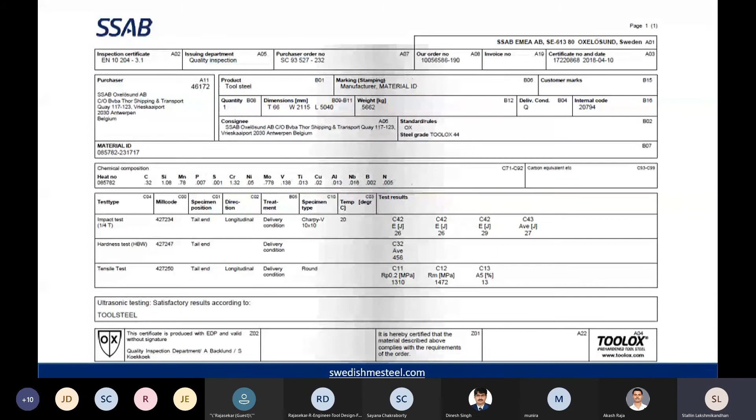So as we were discussing on the test certificate of the material, we make sure that Toolox has the world's largest testing facility in Sweden. We make sure that all the parameters inculcated into the TC are given to all the customers without any issues. So Toolox is being produced with blast furnace. It doesn't follow the age-old electric arc furnace methodology.

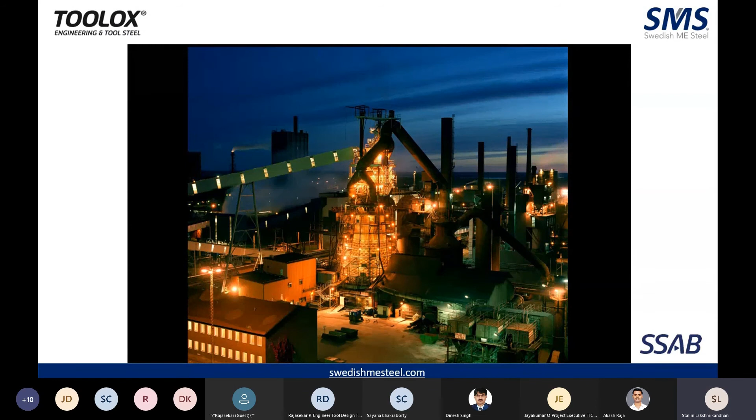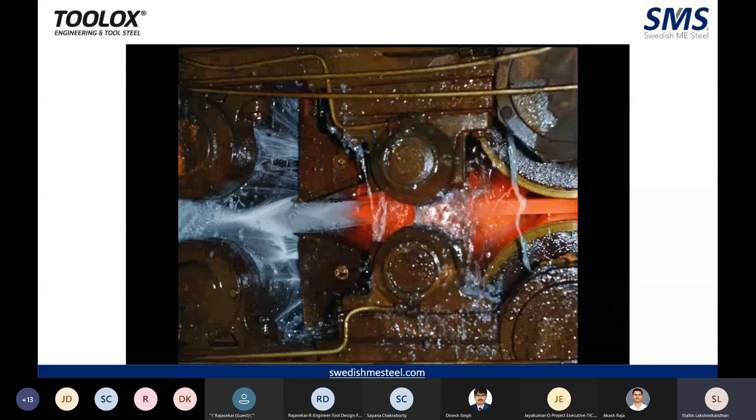So this is where the entire R&D of the metal happens. Depending upon the different thicknesses of the plate, at which angle, how much was the quantity of water being quenched, that all decides the properties of Toolox.

As seen, Toolox is a multi-purpose steel. You have 45 HRC material, with high strength, as also with high toughness. This unique combination of all three helps you in using this similar grade of material in different engineering applications. As you can see, it can be used in plastic molds, in cold forming, and in hot forming also. Various other engineering applications also you can use it for.

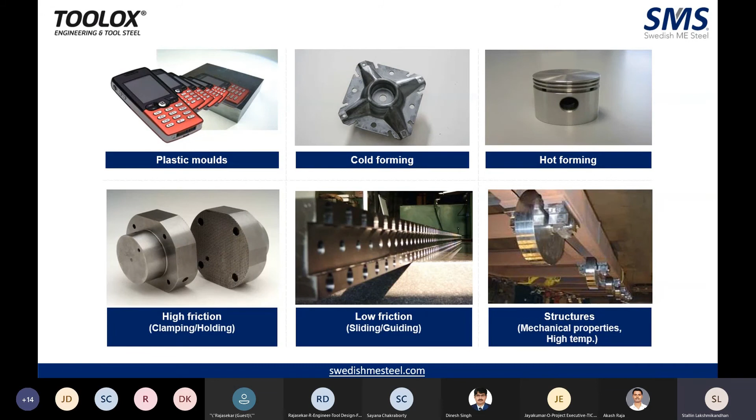So as the webinar topic goes, today we will be solely concentrating on cold forming applications.

So these might be the common cold forming grades that you would be using: D2, D3, D6, Calmax. So if you use your application wisely, and depending upon what you expect out of the material, then it's possible to replace all the grades whichever has been shown here with Toolox. So you'll be able to replace with Toolox.

So that is the advantage of using the material, that there is one grade available. If the application is being chosen wisely, depending upon what you want out of the material, then it is very much possible to use the same Toolox grade even for your D2, as well as for your Calmax, or even for your D3. So let's see during the course of the webinar how exactly it's been done.

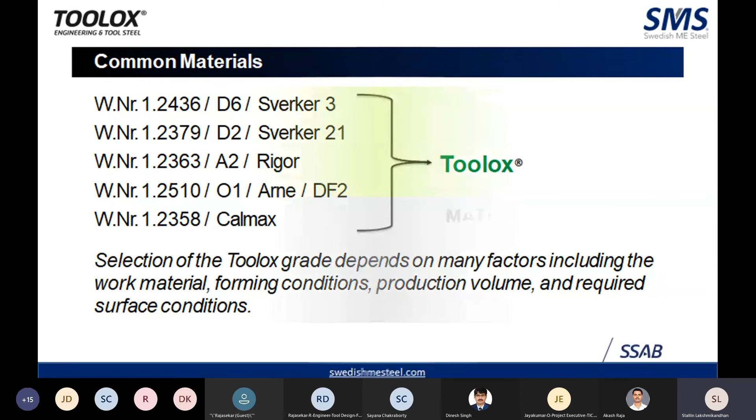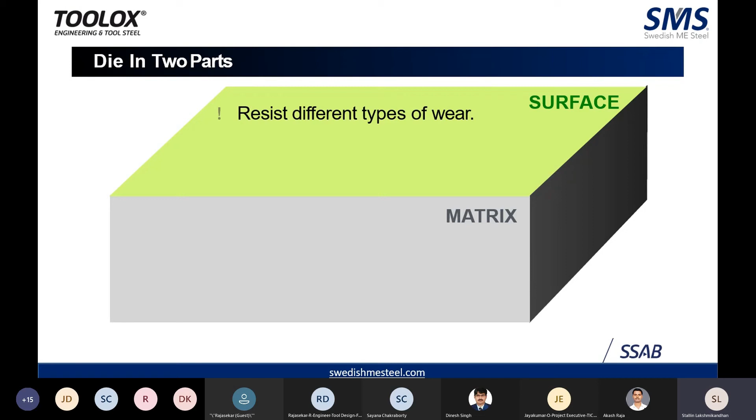So when you take a die in two parts, what the metal has to offer you both at the surface level and at the matrix level. First, at the surface level, the metal has to resist different types of wear. It has to provide you high surface quality as well as the finish, and it should be suitable for surface engineering.

Since the metal is 45 HRC, you might be having a question: okay fine, my application ranges from 58 to 60 HRC, at times even it goes up to 65 HRC, what am I to do? So the question is whether the metal is suitable for any additional treatment, and the metal is very much suitable for additional treatment.

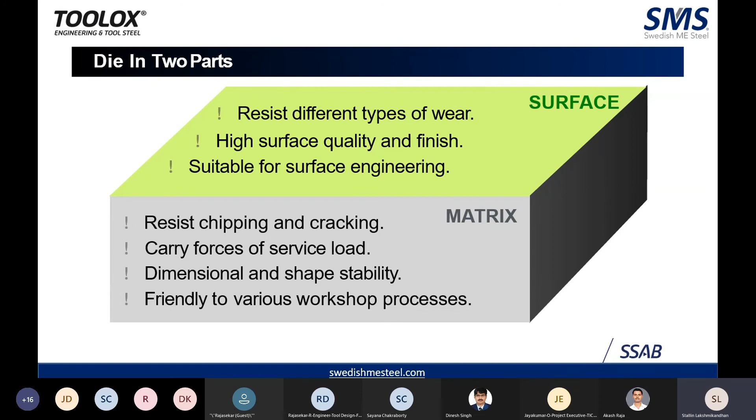So these are all at the surface level, and at the matrix level, the metal should be able to resist your chipping and cracking. It should be able to carry the forces of the service load, and it should also give dimension and shape stability. And last but not the least, it should be friendly to various workshop processes.

Let's delve into some of the failure mechanisms in cold forming. What are the general failure mechanisms that you encounter on a day-to-day basis? First one is abrasive wear, which everyone would be knowing. It has been caused by material working against the tool surface, and it usually happens with scoring. So it is a common problem that you usually associate with.

Point number two is the adhesive wear, or which we call as galling. It usually is caused by friction between two sliding surfaces.

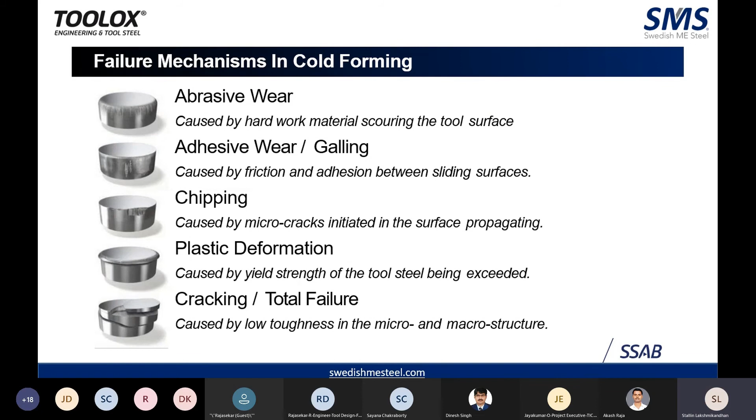So if you have any cold working tool steel right now where you face an issue of cracking, Toolox 44 can immediately replace that particular item. Because Toolox 44, as we had already discussed, comes up with not only high hardness, but also higher toughness. This higher toughness helps you in resisting against crack, both at the micro level as well as the macro level.

This is the adhesive wear test just been done.

So you can see both the scoring area as well as without any.

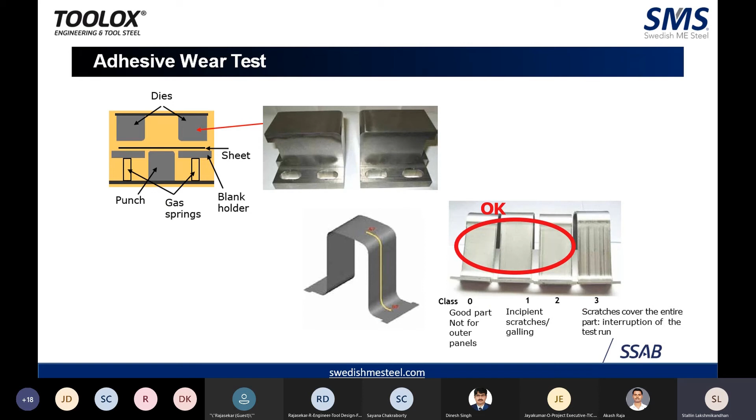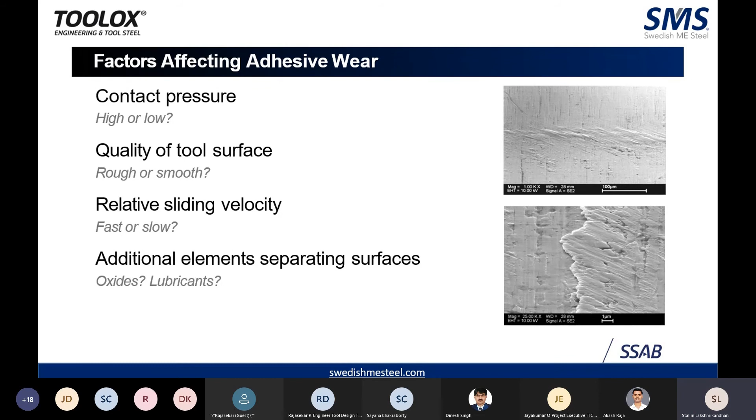Let's see what are the factors affecting adhesive wear. The main important factors being the contact pressure - you can check whether your pressure is high or low. The quality of the tool surface - whether it is rough or smooth. The relative sliding velocity - whether it is too fast or too slow. And additional elements separating the surfaces, like oxides and lubricants. These are some of the areas affecting your wear.

This picture gives you a great idea of how homogeneous the material is. More than the metal being high hard, high tough, as well as high strength, it is also a homogeneous material, so that you can machine it in whatever direction you wish, and you can also finish tighter tolerances.

So this is a 4-meter long gear rack, and the flatness demand is that you're able to get a flatness of up to 0.1 for a length of 1 meter.

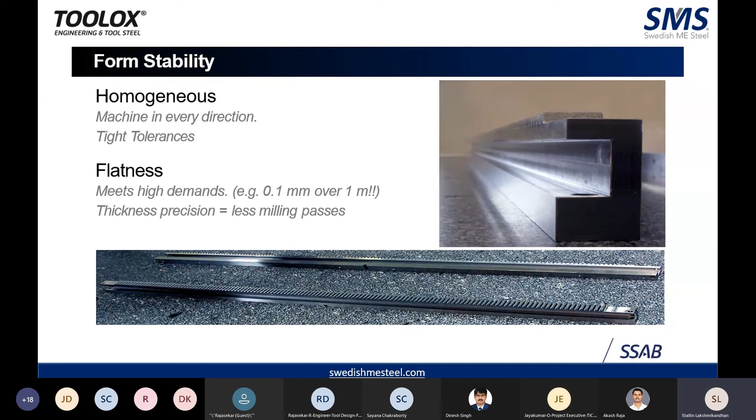So this gives you an idea of how much time Toolox 44, which is pre-hardened at 45 HRC, takes compared to a regular annealed H13 material, or D2, or whatever material you want - we have tested based on H13. Since it's a 45 HRC material, there is no need for 2 times of programming. At annealed as well as after heat treatment, you need to do another set of programming. Here, with Toolox 44, it's only one set of programming, and you can directly go for your fine CNC, whereas in H13 you have to go for rough and fine CNC. And Toolox 44, being a 45 HRC material, you will find the EDM time to be a little higher when compared to annealed material, which is understandable.

So taking everything into consideration, from raw material to the finished stage, the total manufacturing time is drastically reduced by around 25 to 30% when using Toolox 44 compared to regular material. And mind you, this is in addition to - not considering - the heat treatment time and the amount being spent, that's all extra. Simply for the material to be changed from raw material to the finished stage, the manufacturing time is reduced drastically by 25 to 30%. This is a very enormous benefit for you.

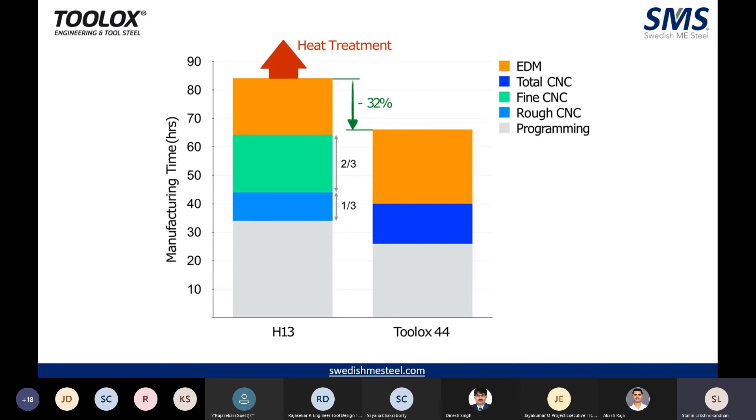Now let's look at the different surface engineering that can be done with Toolox 44. As we already discussed, Toolox is available at 45 HRC. So if I require my material to be at 58, 60, or 65 HRC, what am I to do? There are different processes you can do. Of course vacuum heat treatment is ruled out, since it's already heat treated material. You can do whatever surface treatment possible - nitriding, PVD coating, induction hardening, and also laser hardening.

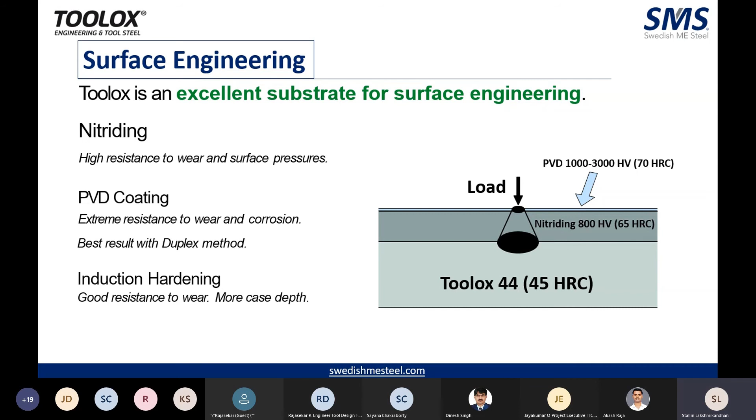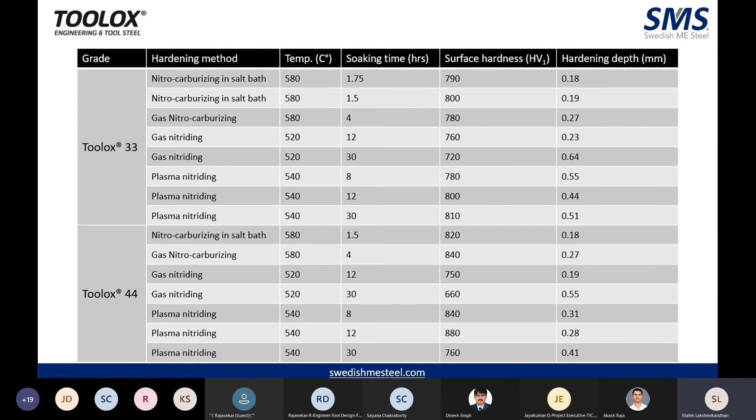This is a table which we have done for nitriding of both the Toolox 44 and Toolox 33 grades. Depending upon the surface hardness and the hardening depth you require, you can choose the soaking time and the temperature, depending on your usage and application, to decide what exactly you want out of the material. So this guide would be very beneficial when you do nitriding.

Induction hardening with Toolox 44 is also a very interesting combination, particularly due to the high yield strength of Toolox. With induction hardening of Toolox 44, the hardness you can achieve is 55 to 57 HRC, with a depth of hardness of 2 to 4 mm.

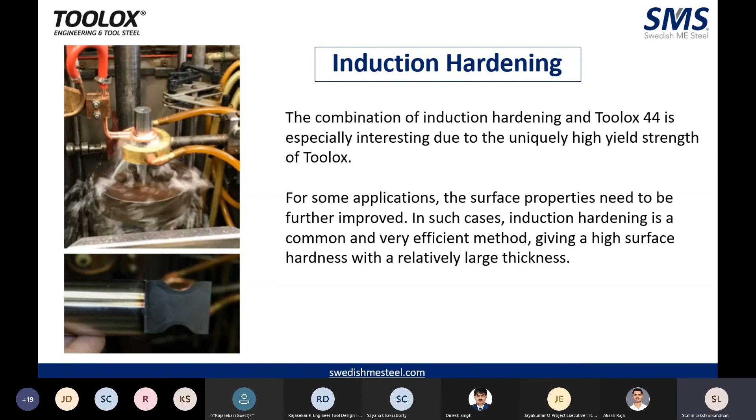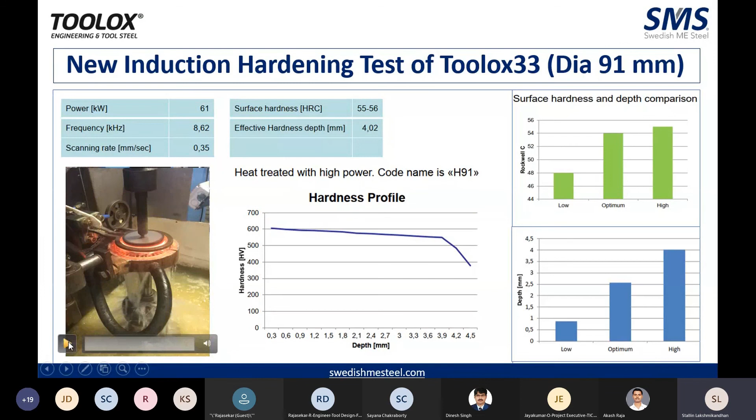So these are the parameters which we have done. This is a short video of Toolox 33 dia. As you can see, the effective hardness depth is 4.02 mm with a surface hardness of 55 to 56.

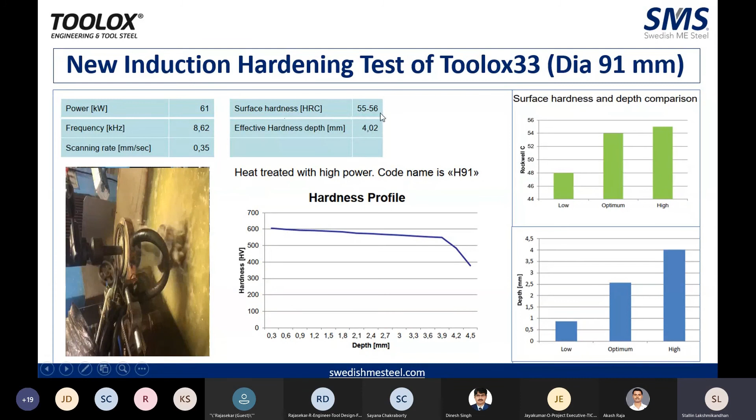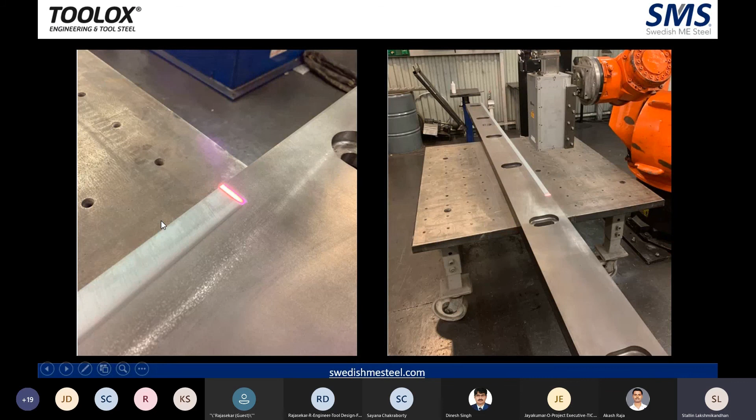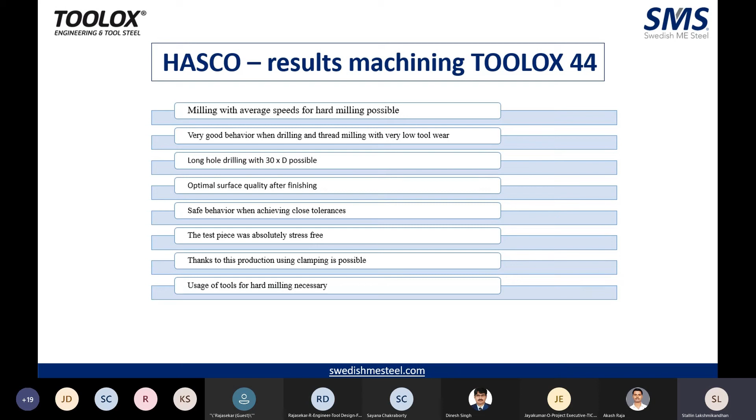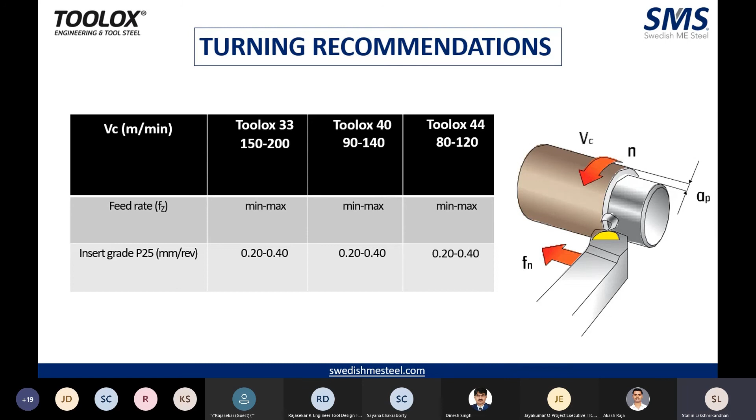So let's look at some of the machining parameters for Toolox 44. There is a mold maker available in Europe known as Hasco. They have included Toolox in their own brochure for usage, and they have done extensive tests with the machining also. So these are some of the points that have come out of their testing of the material - some turning recommendations, and some tapping recommendations.

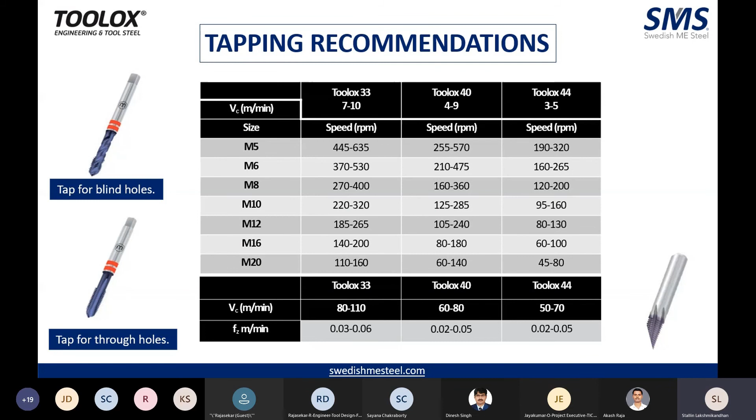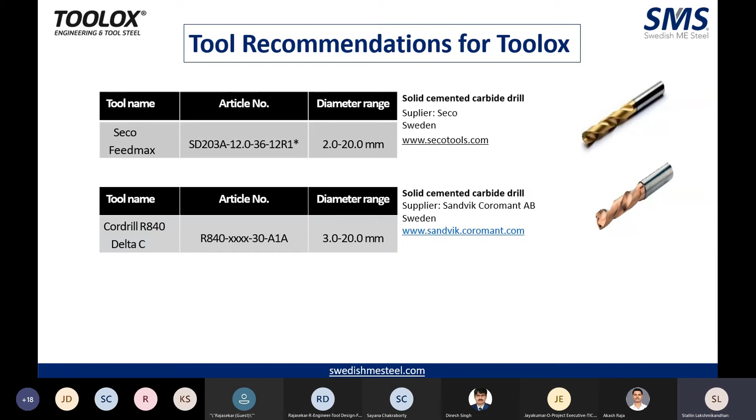Some of the drilling recommendations for Toolox - we have an extensive brochure for all the machining parameters of Toolox, and we can share it with all interested. Since it's been done on a global basis, you will find the suppliers are all of European origin, but it doesn't necessarily need to be only European origin cutting tools. You can ask your regular cutting tool supplier to provide equivalent nomenclature of tools which should be able to do the job for you.

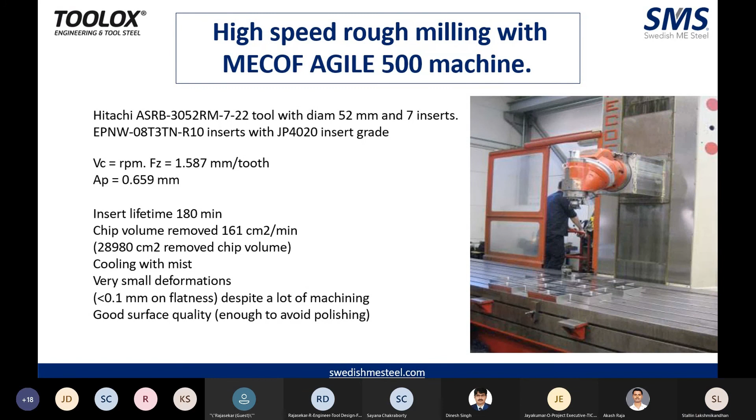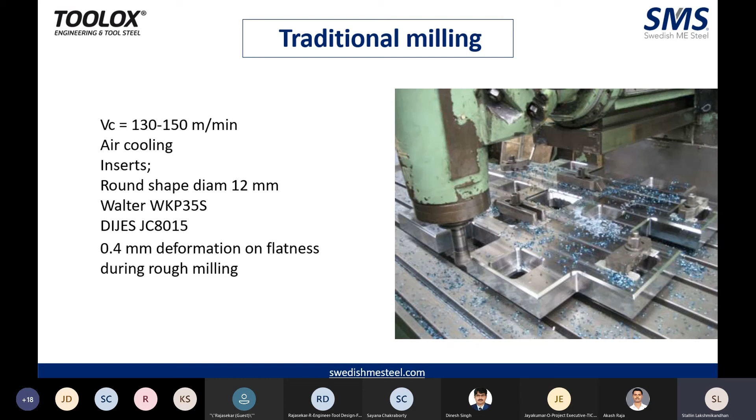Even with traditional milling, it's very much possible - you don't always require expensive or super expensive tools. In traditional milling, the deformation levels are still larger, at 0.4 mm deformation on flatness during rough milling.

This is a small video which we have done in a general tool room in Pune, India.

As you can see, 45 HRC material being milled out without any issues.

So we have looked at how Toolox is being manufactured, what are the different surface engineering processes that the metal can take, and what are the different cutting tools required for machining of Toolox 44. Now let's delve into different areas where Toolox has been used in different cold forming applications.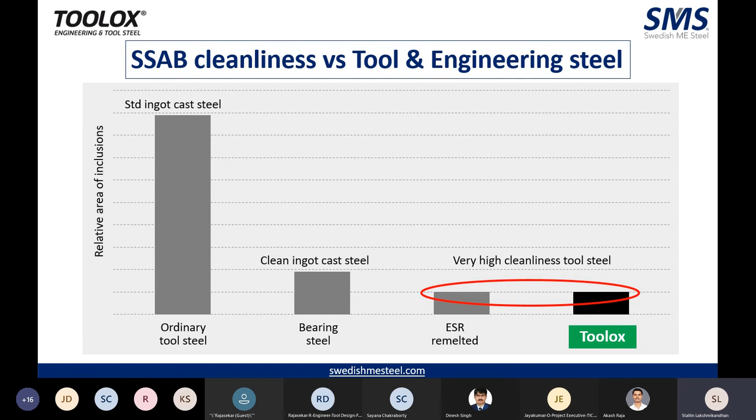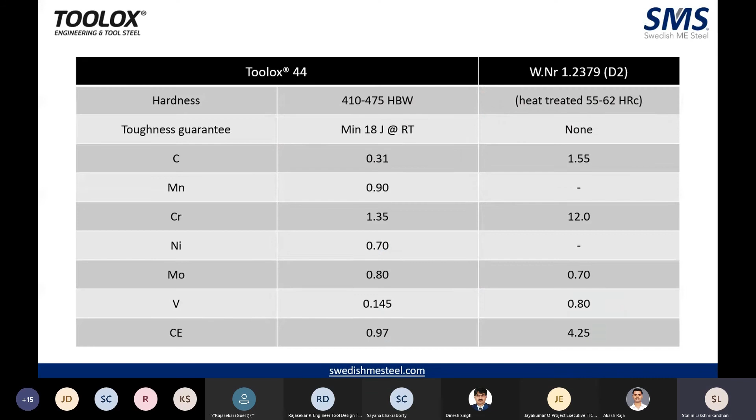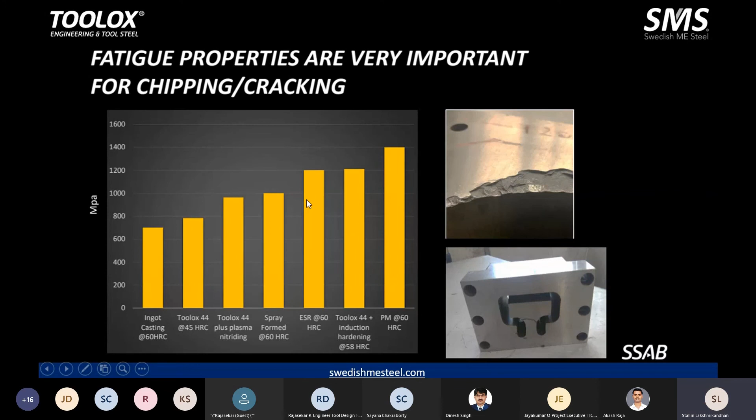Toolox 44 at 45 HRC will give you a good result. But parallel to that, Toolox 44 plus induction hardened at 58 HRC also gives much better results, even compared to powder metallurgy steel or ESR steel. So that's the kind of options that the metal can offer you.

We keep saying that the material of Toolox 44 is very tough as well as ductile. You find that even in cases of not only using it against D2 or a modified D2 version, but even for PM steel, there is possibility to replace with Toolox if the application is chosen wisely. As you can see, the laser hardened Toolox 44 or PVD or CVD coated Toolox 44, this coated steel has very high toughness values as well as very high wear resistance, even compared to both conventional steels and powder metallurgy steels.

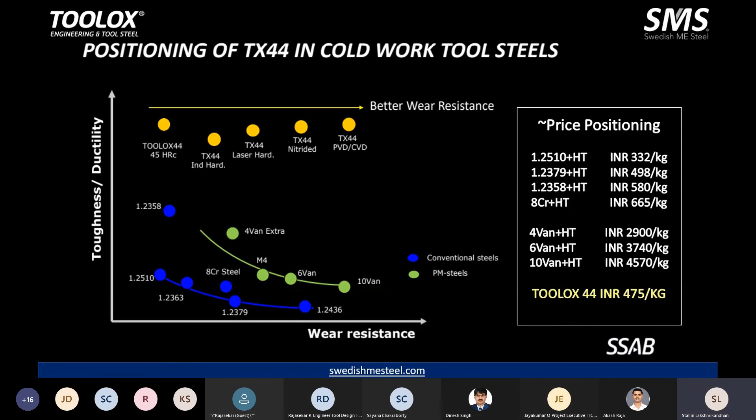We have done our own research, and based on extensive input received from across the globe, we have made these particular parameters, which give you a very detailed study of what you can use depending upon the application, and based on what you want out of the material.

If your sheet thickness is less than 500 MPa sheet, and if you are going to use it for forming applications, then you will find that Toolox 44 is more than enough. If you use less than 500 MPa sheet, and if it is less than 15mm, you can use the laser hardening method. And if your sheet thickness is more than 550 MPa, but the thickness is less than 8mm, then also you can use laser hardening. So depending upon the tensile rating and the sheet thickness, you can decide on your particular application.

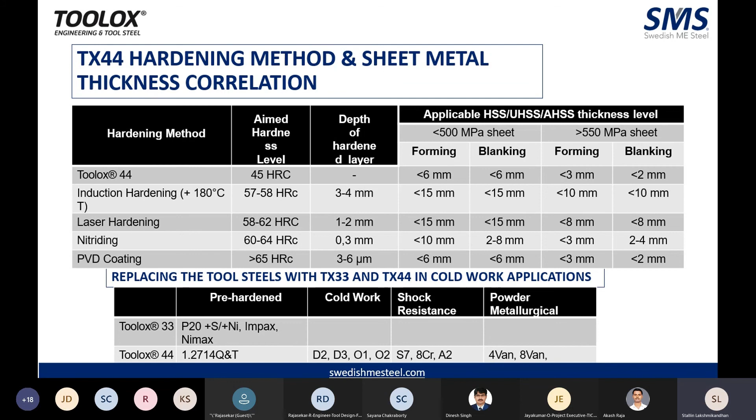The reason tool makers prefer to go, or are now going, with different kinds of segments is that you're not sure about the quantity or quality of the metal you are going to get. At the same time, if something goes wrong, you can choose that particular component and replace it with another. Since with Toolox 44 what you get is a guaranteed version of all the properties, you need not worry about the quality of the material which you have in hand. This gives you ample evidence as well as additional confidence required for this.

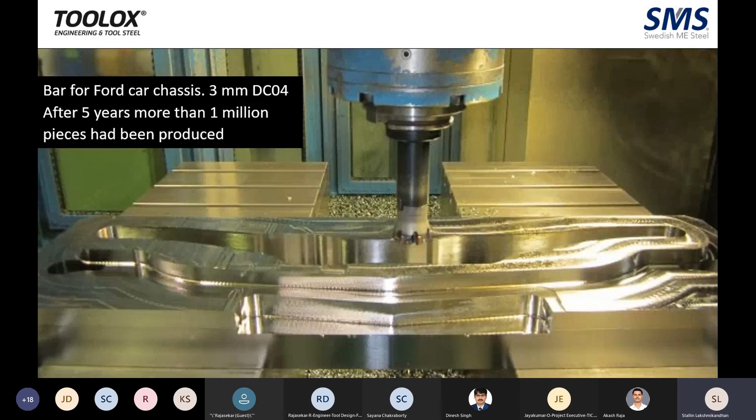So you will be able to do it in a monoblock. You need not do, for example, if you have a 1.5 meter length of tool, then you need to do 5 or 6 different compartments. This is not required for Toolox, which can be done in one single piece. So even for your commissioning, it will decrease your costing as well as the time, and it will also improve your timing in commissioning.

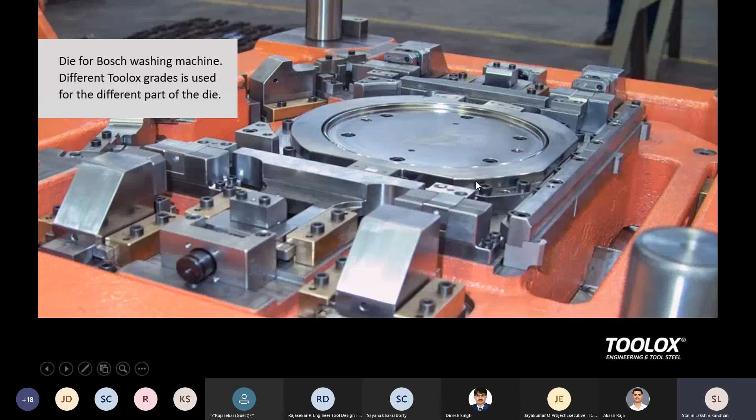Toolox 44 plus nitriding, again used in monoblock, for different components of a die, a Bosch washing machine. This is for a Scania truck. This is the Audi A8 B-pillar.

This is the common area where you will find this. You will find welding usually being done because of cracking, which will not happen with Toolox.

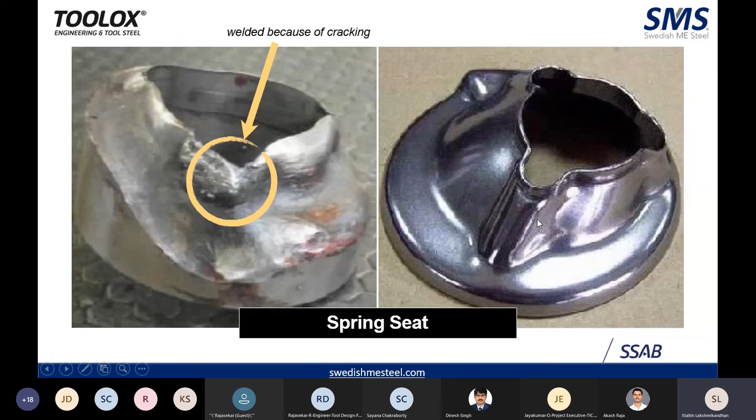Die for stamping heat protection shield, 2.2 millimeter of S355.

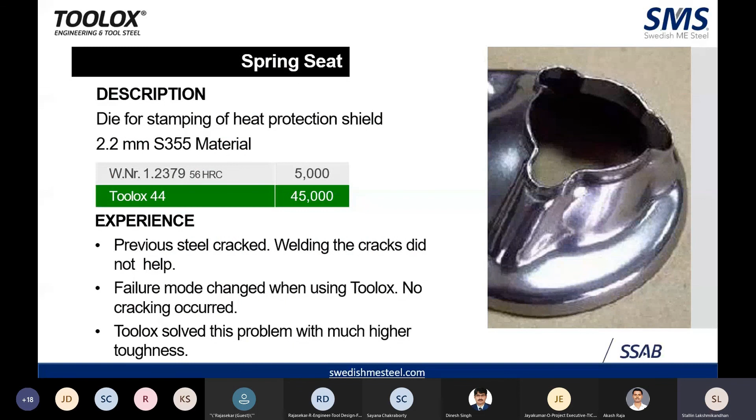Let's delve into some of the deep draw applications. This is another monoblock which has been done with Toolox 44. This has been done for two-wheeler fuel tank die made in monoblock with Toolox 44, for an Honda SP Shine model.

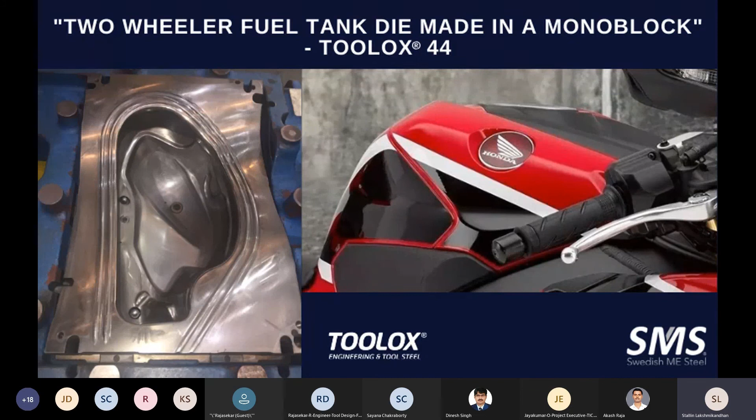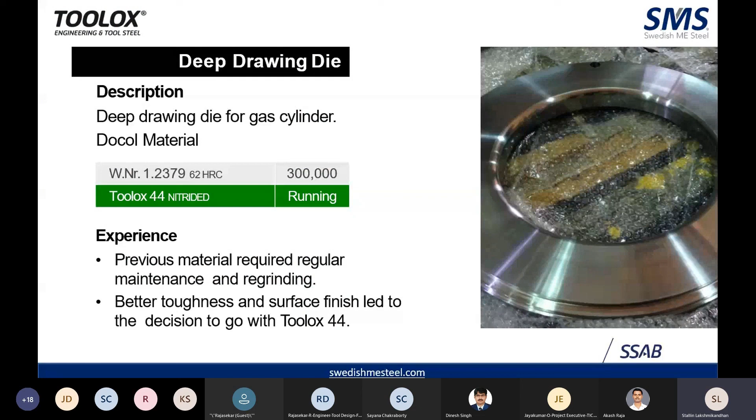This is another deep drawing die. Some of the similar components which has been made.

So we are seeing the forming application, we have seen some of the deep drawing applications. Let's look into some of the cutting applications.

So once you have a cutting application in front of you, again what you had for the tabulation for forming, you have the tabulation again for the cutting. This gives you a much clearer idea of which grade of Toolox you can use, and which kind of surface treatment that you want to really use. The sheet metal thickness between 0 to 3 and 3 to 6, and you can use up to 15 mm.

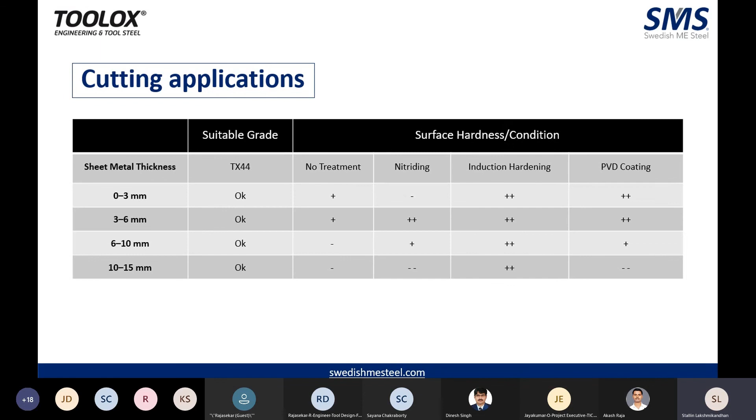Once it crosses 10 mm, then it is suitable to use with Toolox 44 plus induction hardening. As we had already mentioned, Toolox 44 is very much useful for carbon equivalent metal less than 1, which means it is going to be very much useful for your thermal cutting as well as your welding. Let's see how it has been easily cut.

This is a 120 mm Toolox beam gas cut without any problem.

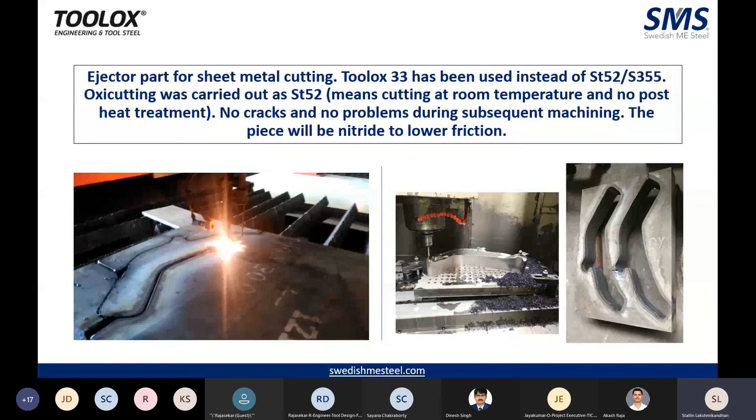If you have any particular shape or profile which needs to be made, you need not take a square and then machine it to the required dimension. You can just cut to these required dimensions fully and then only machine out the heat affected zone. That will bring down your total manufacturing time considerably.

As you can see, the metal Toolox 40 plus laser hardened can also achieve very excellent results for this one. Here it has given tool life of 1 lakh shots without any regrinding.

Previously it had to be reground for every 2000 to 3000 shots, which was very cumbersome. And even though it was an expensive material, the same process was taken care of with Toolox 44.

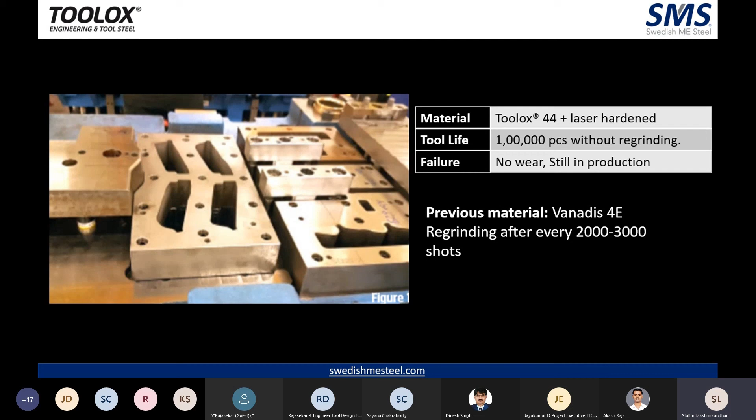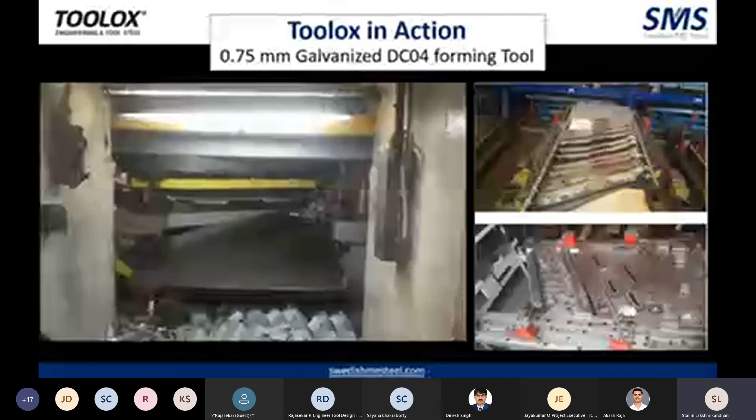And these are some of the pieces which have been done with Toolox. Now let's see some of the Toolox used in progressive dies. This is Toolox in action in 0.75 mm galvanized forming tool.

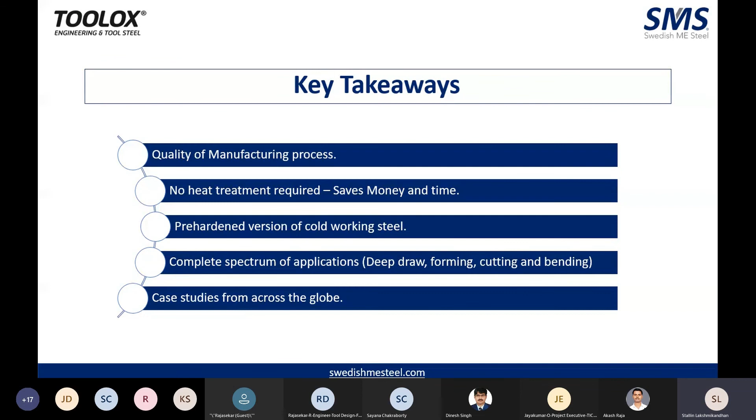Hello, good afternoon, Mr. Stalin. Sir, good afternoon, sir. Yes, sir.

You mean to say this one? Yeah, this one. Yeah, 0.9 sheet thickness. So what was the material? Which material were they using?

It should be, I don't know the exact material, but it should be SS I think. They're doing SS. So what was the SPM, sir? SPM of the machine? Sir, I really don't know. Actually, if we use 57 case hardened or fully hardened material for high speed stamping, it runs around 600-700 SPM. It should not be an issue for SPM, sir. Absolutely no problem.

No, actually the thing is you said there is some wear depending upon the relative velocity of the action going on, right? No, the only thing I wanted to showcase is, as you can see, with D2 at 20,000 pieces the mode of failure was cracking. That cracking didn't occur even at 80,000 pieces. So at 80,000 there is only wear. Then we need to resharpen it. Yeah, resharpen it. Okay.